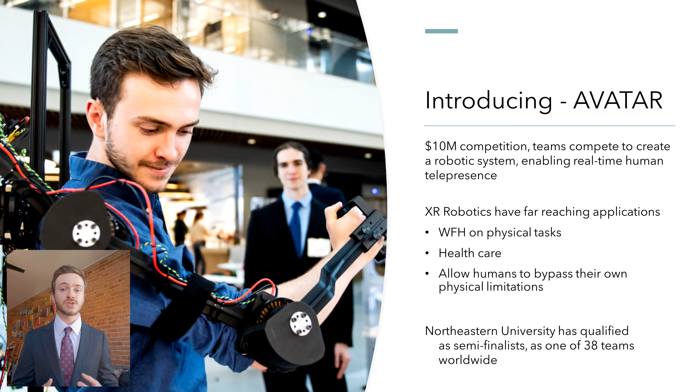Consider, for example, a robotic system in ambulances that allows doctors to treat patients before they even reach the hospital. Extending our presence over distance enables us as humans to solve problems quickly in unknown and even potentially hazardous environments.

The ANA Avatar XPRIZE competition provides guidelines defining a broad range of activities as possible testing scenarios. We decided to focus on a single task amongst these scenarios and align our problem statement with achieving that task. A person should be able to interact physically with the avatar, for example, a simple handshake.

There was one question our group was left with: in what ways can we provide a system where a person can navigate an environment from afar and successfully interact with that environment? The ultimate goal of our capstone was to supply a reliable control system capable of contributing to this specific task and scaling to future use cases.

We started our project with a physical system designed by a previous mechanical capstone team. This included a robotic exoskeleton and avatar arm. We accomplished our goal of precise control by designing a motor controller, including a custom PCB and firmware. On top of this, we implemented RS-485 daisy chaining to create a controller network between different joints on the avatar and exoskeleton.

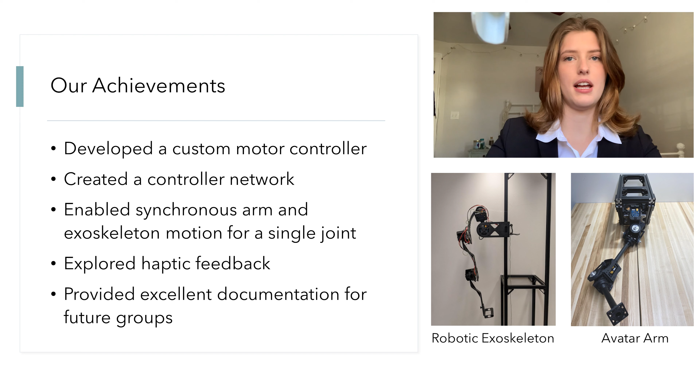Hi, I'm Carl Swanson, and I'm the team lead. I led integration between the mechanical, software, and electrical subsystems.

My name is Anya Derrick, and I was the electrical team lead, directing custom PCB design and fabrication.

I'm Spencer Soshin, and I'm on the CE team. I led the RS-485 protocol and the motor controller firmware development.

My name is Peter Albanese, and I led the research effort for visual feedback and user integration while supporting CE design efforts.

I'm Shay Blackinger-Slocum on the EE team, and I lead team organization and logistics while assisting with electrical design.

I'm Peter Downward, and I'm on the EE team. I lead research efforts on component selection and assisted with PCB design deliverables.

I'm going to talk about design constraints the EE team faced when considering our options for motor control. Keeping our test scenario of precise motion in mind, our first priority was enabling the proper level of control between the PC and motors. The controller should be capable of directing movement within 1 degree of accuracy. This meant the motor controller needed to perform sinusoidal control.

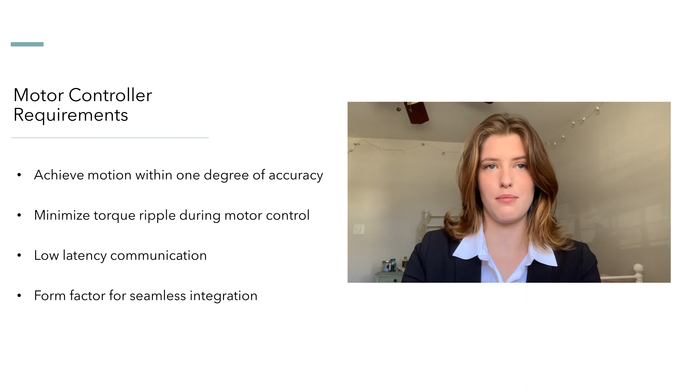We also had to satisfy the torque requirements of the existing motors provided by the previous capstone team. This meant a board capable of supporting 48-volt motors. In terms of communication, we wanted flexibility in choosing between RS-485 or CAN, as we were considering both low latency protocols as options. Finally, seamless integration with the previous capstone team's mechanical construction influenced our design path.

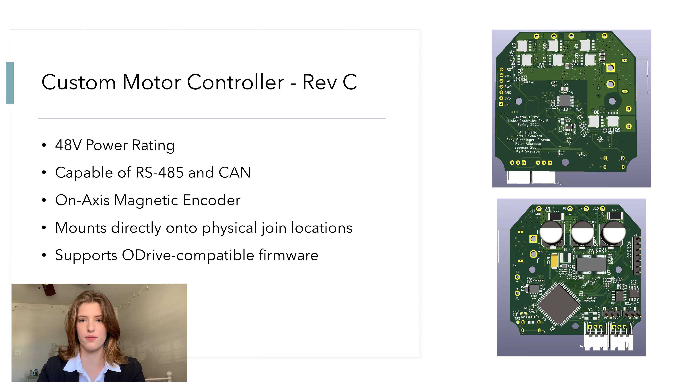Our second path would expand on the board started by the previous capstone team. The RevB 2-layer PCB did not have a high enough power rating for the 48-volt motors and lacked filtering, which created interference on communication lines. We decided to improve this design and develop a new version of the custom PCB that would satisfy all our motor controller needs.

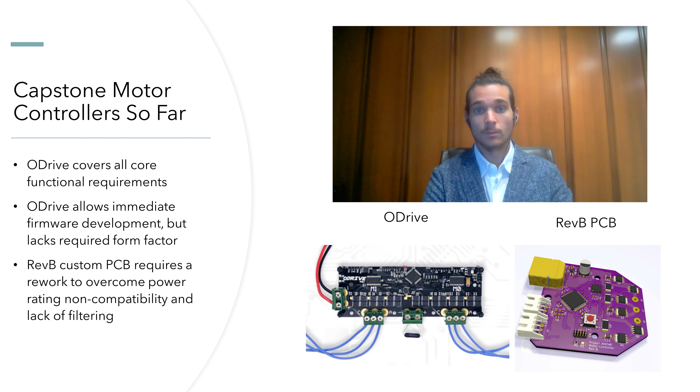Our total budget came out to $1,700 to $2,000, which is expected for a robotics project of this scope. Due to global part shortages during our build, our PCB budget had to be increased significantly to enable assembly.

Our team made the initial decision to purchase 2 ODrives so the electrical and software teams could work in parallel. While the EE team designed the PCB, our software team was able to write firmware and also leverage the open source firmware from ODrive for rapid prototyping. As the ODrives do not come with stock encoders, we developed our own prototype encoder board that connects directly to the ODrives.

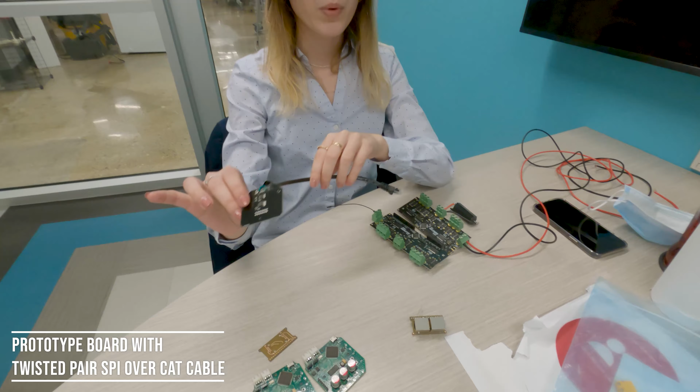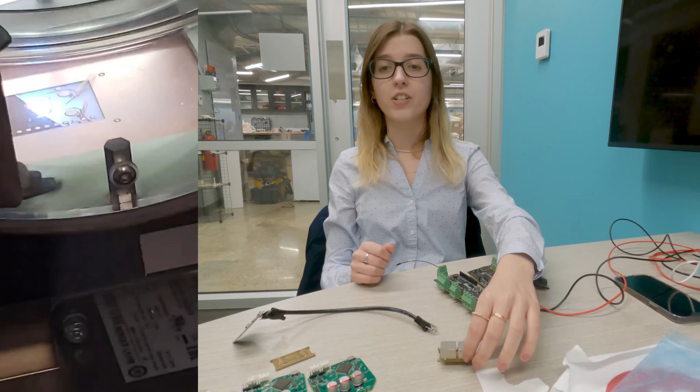However, we immediately noticed irregularities in motor performance due to the long, noisy SPI lines between the O-Drives and the on-axis encoder boards. To solve this, we learned to use an LPKF laser cutter at Northeastern to rapidly develop custom shields. These shields allow for twisted pair SPI lines to interface directly with the O-Drives, and the CEs could immediately begin development.

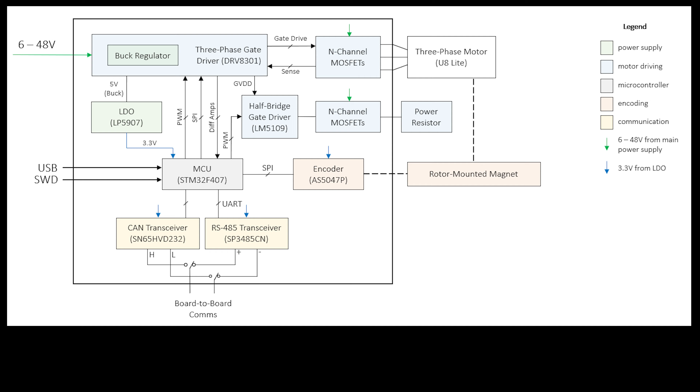The final revision of the electrical team's custom PCB has a 48-volt power rating, which we achieved through specific component selection and a 4-layer design. We chose a DRV8301 driver chip as it has an internal buck regulator enabling fewer components down the line. We moved to a 4-layer board to improve not just power and thermal performance, but to optimize signal routing for low latency communication. This board has both RS-485 and CAN capabilities, and we included select pins for smooth transitioning between the two.

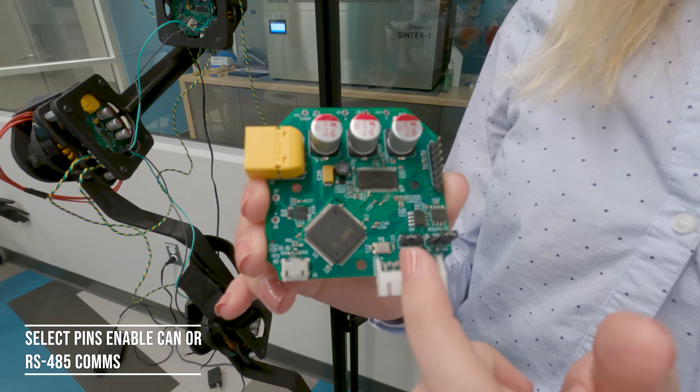The signal routing also allows for reliable SPI lines between the STM32 microcontroller and the encoder on the reverse side. As you can see, when the board is mounted to a joint, the encoder placement perfectly lines up with the motor rotor. Such integration with the mechanical system was not possible without creating a custom board. Finally, the component selection also supports the firmware written by the software team. Our boards will seamlessly integrate with their design, which we will show in the following demonstration.

Inspired by MIT's Mini Cheetah, we decided to use Mbed OS for our motor controller firmware because it provides high-level abstraction for things like GPIO and reliable drivers for SPI, serial, and other communication interfaces. This allowed us to focus entirely on writing our custom firmware rather than dealing with low-level details.

We wrote drivers that successfully interface with our SPI encoder and motor driver to read positions and to command motor signals. Dependency injection was implemented so that both the encoder and the motor driver objects could share the same SPI resource, as they were connected to the same SPI lines on the PCB.

In the end, our biggest obstacle was calibration. We were unable to move our motors in a predictable manner with the custom board, which is crucial for calibration. Since we were unable to calibrate motors, we could not perform motor control with our boards. Ultimately, we decided to compromise by using our custom PCBs to read exoskeleton joint positions and send these positions over RS-485 to our ROS control node.

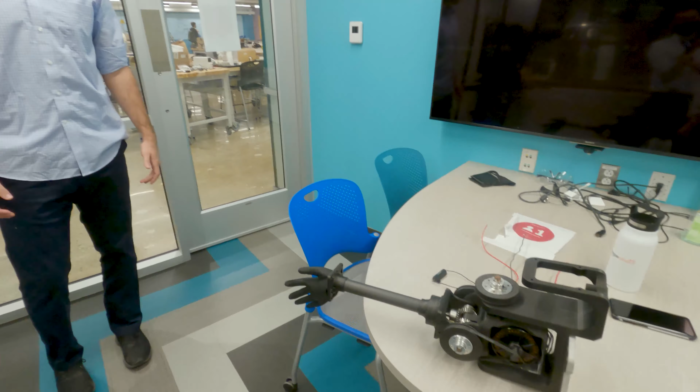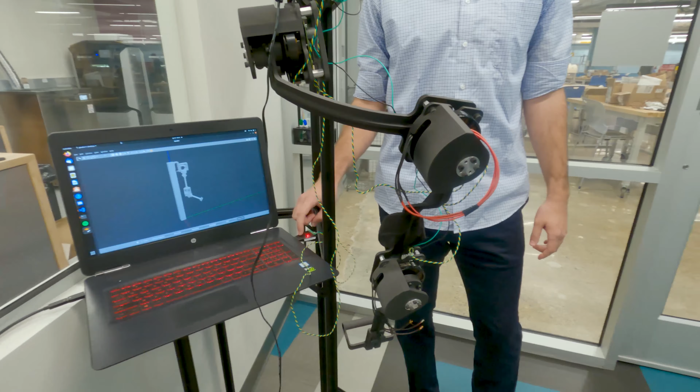This node drives a 2-joint Gazebo simulation and a 1-joint O-Drive controlled robotic arm in the real world. We chose RS-485 over CAN bus because it can handle a faster data rate and it was quicker to incorporate into firmware. We read out position values from the microcontrollers to the PC using a ROS node that interfaces with this RS-485 dongle. The dongle is connected to each controller board in a daisy-chained RS-485 network. Our firmware uses a simple request-response scheme.

The node sends out requests to the network asking for a specific ID. The microcontrollers read all requests and respond with the position of the motor they're attached to when their ID is requested.

We included safety considerations both in our design and our recommendations to future teams. Using both OSHA and IEEE standards, we developed a safety protocol for our team members when testing the system.

The previous mechanical team provided a great foundation for both the EXO and Avatar, with mounts to prevent vibrations, movement, or tipping. During our Capstone, the user always had the main power switch easily accessible, even when wearing the exoskeleton.

A teammate never wears the exoskeleton without another person present during testing. For future teams, we have included an operation manual in our report to guarantee proper use. We also recommend future design teams create an emergency stop, also known as a big red button, for when people external to the team are allowed to work with the avatar.

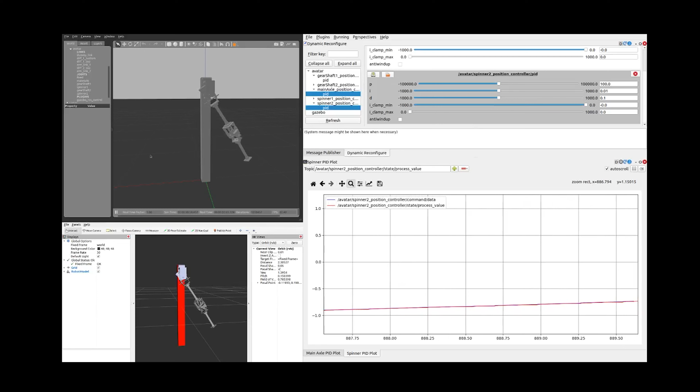Here we can see a simulation of our robot in the ROS tool suite. We have Gazebo, RViz, and RQT displayed here. We can easily view the joints in our robot, for example, the elbow joints, the main axle, etc., and we can look at the centers of mass, inertias, and other physical and dynamic quantities associated with our robot.

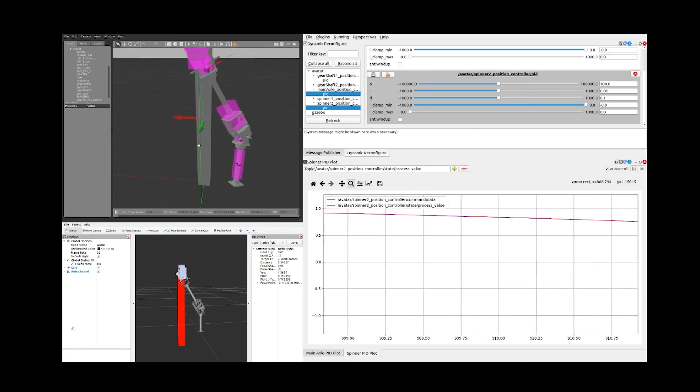ROS control gives us the ability to easily tune our PID for simulation and real-world applications. And we can see in the bottom right our finely tuned PID with the expected and actual joint positions graphed.

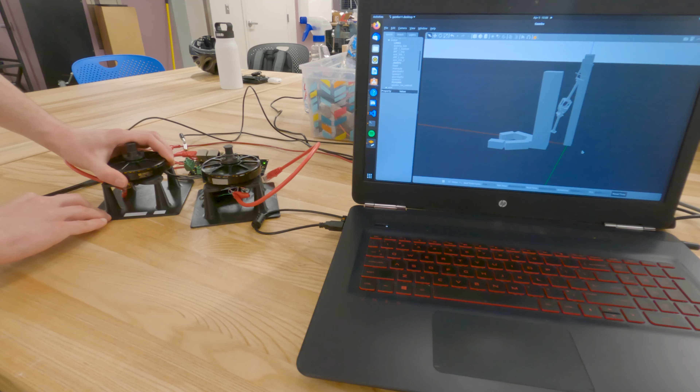By leveraging ROS and Gazebo, our team is capable of seamlessly switching from the simulation space to real-world robotic applications. This has been integral in developing our control algorithms remotely during the COVID-19 pandemic. Additionally, bugs that may destroy hardware in real life can easily be found and corrected in simulation before it's too late.

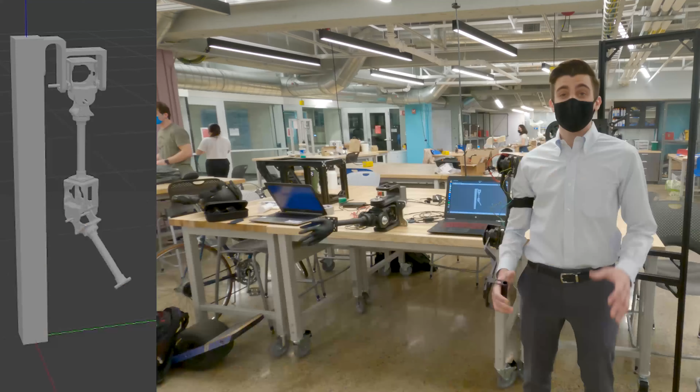Here we have our full exoskeleton system running on our custom PCBs and translating motion to the avatar arm in simulation and the real world.

The boards on the exoskeleton are outputting position commands over RS-485, which are buffered on our master computer and broadcast over ROS topics. Both the gazebo simulation and the avatar control nodes subscribe to these topics and map the commands to motion.

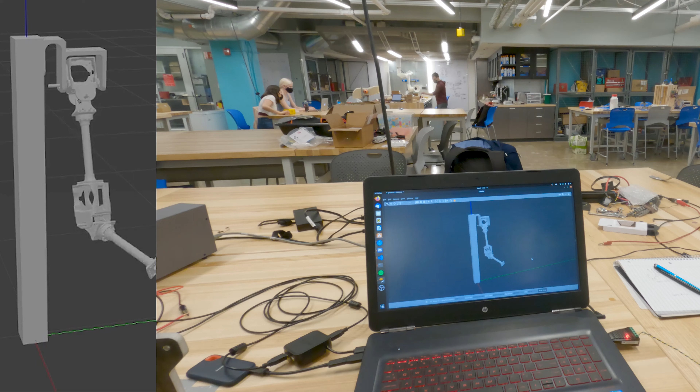Our gazebo simulation includes a fully defined URDF, or Unified Robot Description Format. The URDF includes transmissions on each movable joint of the robot. These transmissions are in turn controlled by the ROS control package, which enables the motion you see here.

This demonstration illustrates our full design pipeline, from interfacing with the user to testing and simulation, and finally, moving the avatar arm to shake a hand.

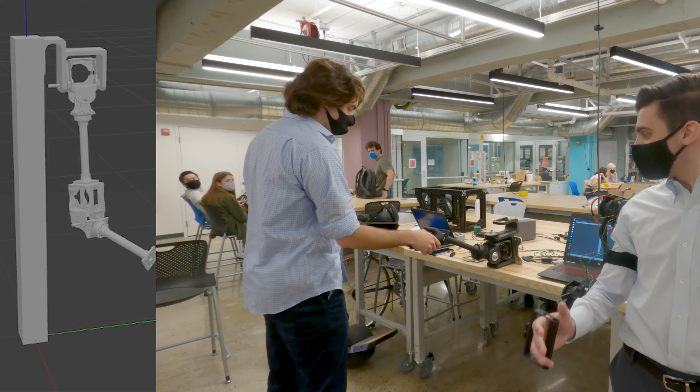This is the culmination of our team's combined efforts this year. With our group accomplishing mimicked arm motion and a robust communication protocol, we have positioned future groups to explore new aspects of the project. Through the addition of modular end effectors with our simple board network, the system can be

customized for a variety of scenarios, meaning it is ready for anything. The addition of a mobility chassis will allow the avatar system to move freely through its environment, unlocking the user from a strictly stationary experience.

Lastly, the continued development of force feedback and the addition of visual feedback for the user will provide an unprecedented level of immersion. Through the integration of a virtual reality headset and 3D cameras on the system, the user will have a full view of the world around the avatar system.